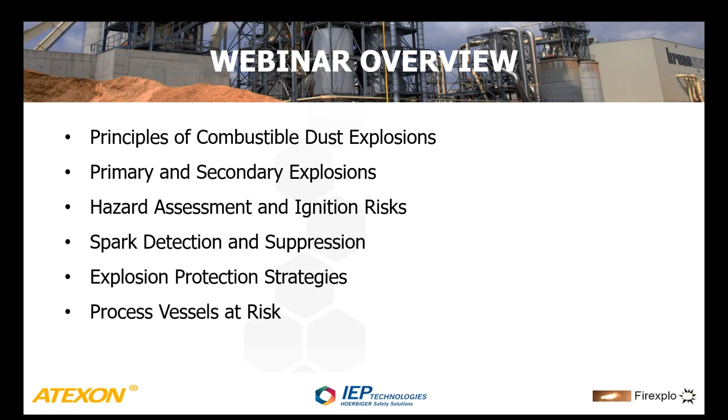Moving along to a quick overview of today's webinar. Our speakers will discuss principles of combustible dust explosions, primary and secondary explosions, hazard assessment and ignition risks, spark detection and suppression, explosion protection strategies, and process vessels at risk. That about covers it, so let's get started and welcome our first speaker, Bob Zalosh of Firexplo.

Bob, you may begin. Thank you, Anna, and greetings, Biomassers. My assignment today is to describe dust explosion hazard analyses for biomass facilities. I'm going to start by discussing the elements of a dust explosion, beginning with, of course, the combustible powder or dust that's often in a layer or pile form.

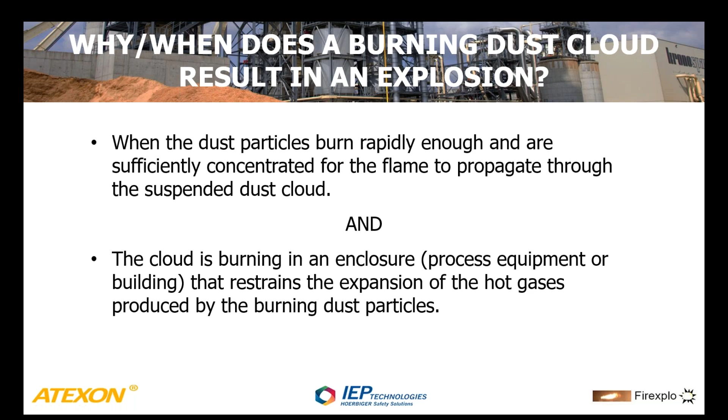In the case of biomass equipment, these suspended dust clouds may be present during routine operation in particle size reduction equipment, such as hammer mills and grinders, in conveying equipment that can be bucket elevators or screw conveyors, in storage bins during loading and unloading, in dust collectors during the in-feed to the collector and during the pulsing of the cartridges or bags.

In the cyclone entrance and towards the more concentrated outflow towards the bottom of the cyclone, in pellet coolers due to the airflow, and in rotary drum and spray dryers. We would normally have suspended powder or dusts.

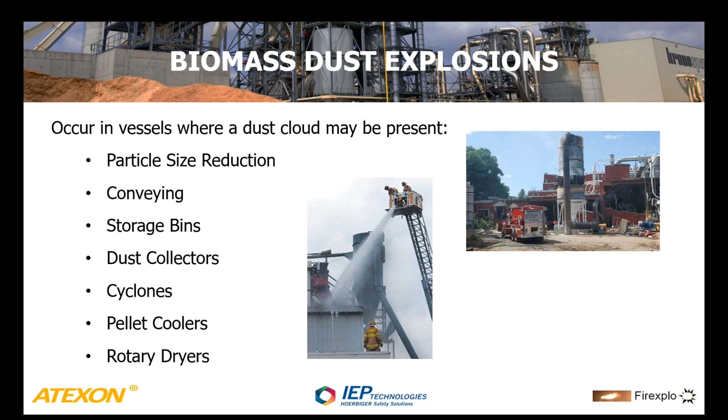Now, I'm going to turn to a few slides on ignition sources in this equipment, and I'm starting with tramp metal as a generic ignition source, and that would be consisting of unwanted metal in the form of screws, bolts, nails, washers, sockets, and a myriad of other small metal objects that can get onto the feed flow, as you well know, if you've operated a facility for any short period of time.

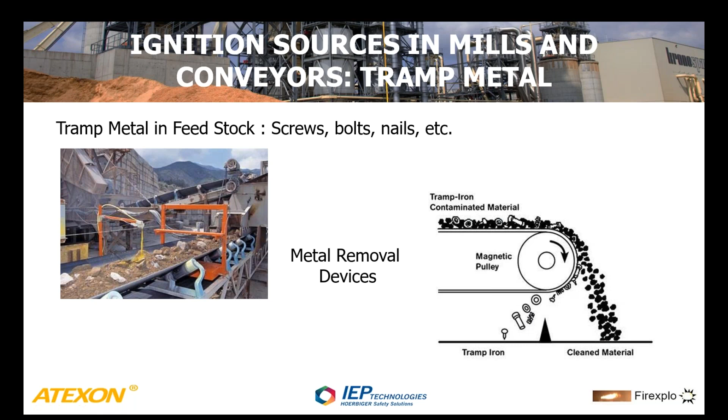And many of the consensus standards require either a magnet or some other metal removal device to prevent those small metal objects from getting into close quarters equipment where they can be lodged between what would otherwise be a moving element, and frictional heating and impact heating can occur, as shown in the next slide.

The next slide goes on to the kind of ignition sources that you might encounter in bucket elevators and various types of conveyors, often due to frictional heating. In this case, possibly from misaligned belts or buckets rubbing on the housing, as you can see from the witness marks indicating the presence of that in some equipment.

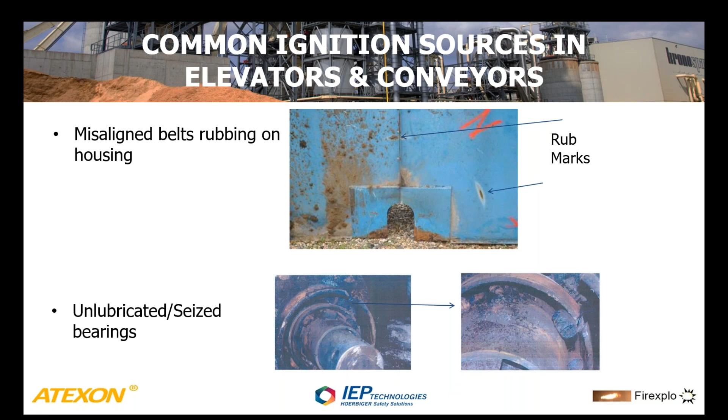Towards the bottom of the slide, you see the other common ignition source in this equipment, which is overheated bearings due to improper lubrication. In particular, the ones on the bottom of the slide occurred on the discharge conveyor of a canola meal silo and started a fire in the silo, which led to other complications you'll see in a moment.

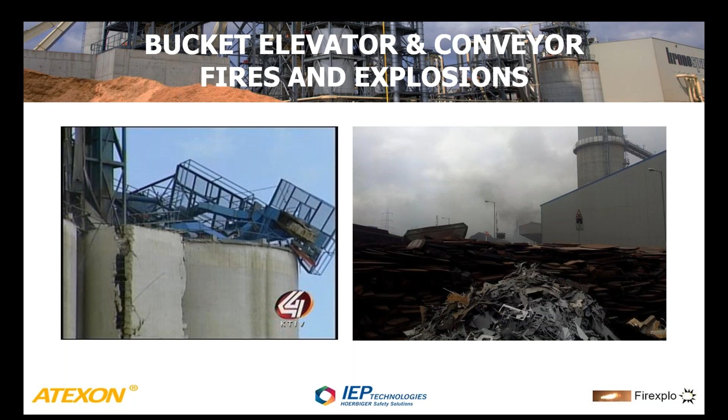Here are some examples of elevator explosions and conveyor explosions that have occurred in some of these facilities, including on the right at a UK port facility where wood pellets were being loaded onto rail cars at the time of a conveyor explosion and silo fire.

Here's a slide on the ignition that can occur in rotary drum dryers, often from particulate accumulations or the recycling of already dry fines. In the example on the left, you see a burned out drum dryer. In that case, the usual material inflow was temporarily halted due to an upstream equipment malfunction, but the fines, which were already drying, were recycled until finally they overheated past the ignition temperature.

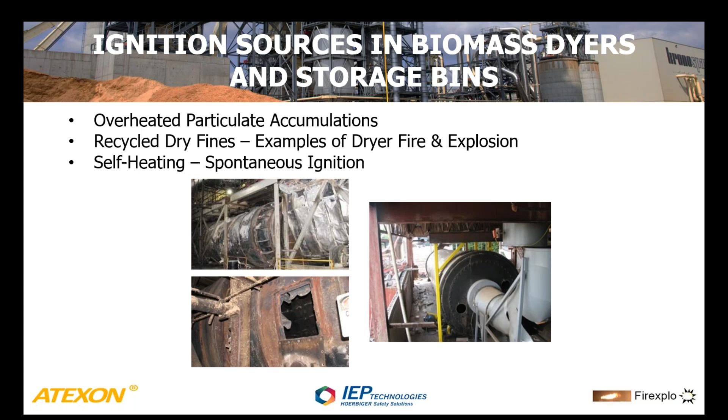The explosion did not occur in the dryer, but in some downstream equipment, which I'll show you in another slide. On the right, you see a large rotary drum dryer in which an explosion occurred, producing damage to the outflow ducting in the lower right, and even more damage at the front and inlet end that caused it to blow out hundreds of meters away and knock off some of the wall cladding on the building you can see in the slide.

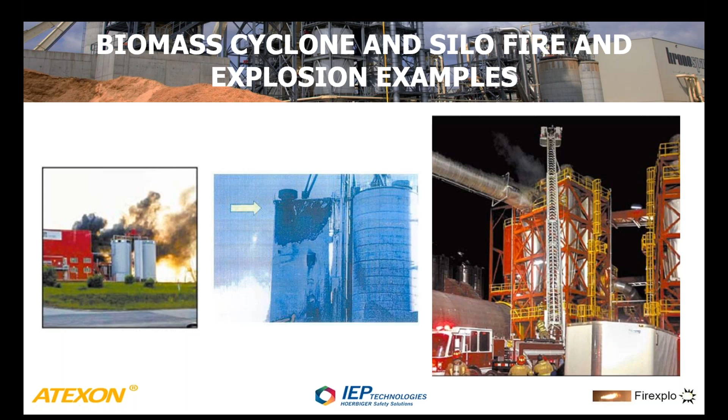Unfortunately, as that's burning, the incomplete combustion products accumulate towards the top of the silo. There's usually a lack of air to create a flammable mixture, but when somebody makes a big hole in the silo to get access to the burning material, that allows oxygen access, and the cutting equipment is the ignition source that created the explosion that caused that damage to the silo.

This shows illustrations of dust clouds and ignition sources that can occur outside of equipment. Starting on the upper left, you see the corn delivery truck unloading station and the receiving pit below, where a dust cloud is formed from the unloading of the corn.

On the lower left is a bag unloading and drum filling station for a mixing operation, where the dust cloud forms. Both of those are examples of open sources of combustible dust clouds.

The diagrams in the center of the slide show the NFPA 499 diagrams to designate where the Class 2, Division 1, and Division 2 areas would be surrounding an open dust cloud. You can see that the Division 1, or in the European case Zone 0, area would extend 20 feet from the source, and the Division 2 area would extend another 10 feet beyond that. On the right, you see examples of dust accumulations in an improperly sealed electrical outlet and heavy dust accumulation on a large motor.

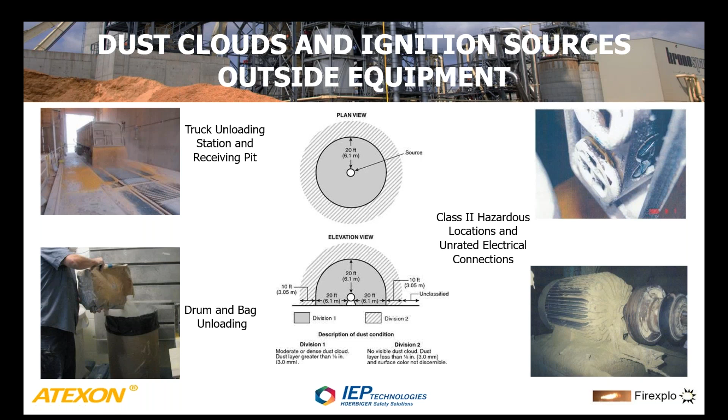This is an example of propagation of an explosion through interconnected equipment, such that the unfortunate casualties occur far from the site of the original explosion, which in this case was in a hammer mill. You can see by the discolored metal that the explosion and fire traveled up the feed chute to the hammer mill, on further up to overhead conveyors, and traveled both upstream and downstream through those overhead conveyors, went all the way back to the receiving warehouse, where unfortunately one of the operators who was feeding material to the end feed conveyor was a casualty of the explosion that propagated and reached him.

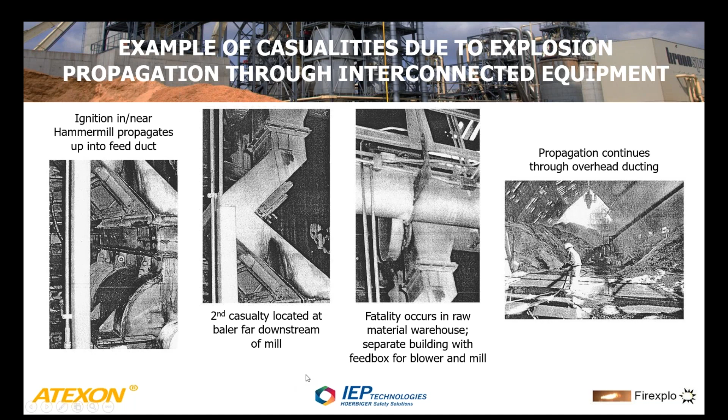There was another casualty located at the baler far downstream of the initiation site.

This is another example of explosion propagation through equipment. This plant was looking at downstream of the rotary drum dryer, where the fines were ignited. Those fines traveled up to a cyclone on the roof, and then the explosion occurred in the cyclone and then propagated through both the inlet and the outlet ducting to other equipment in the plant, and the duct breach in the building produced a secondary dust explosion in the building itself. In this case, there were not excessive accumulations, so there was only minor damage to the building, and luckily only very minor injury.

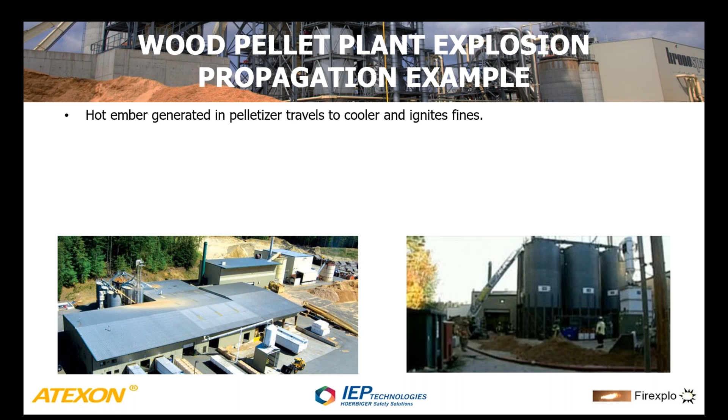This is a photograph of a wood pellet plant that was the subject of some interesting explosion propagation. Hot ember generated in the pelletizer traveled to the cooler in this plant and ignited fines in the cloud suspended dust in the cooler. That ember and dust was transported to a dust collector where the confinement was present that was required for the explosion.

The dust collector was equipped with an undersized explosion vent, so there was some damage. The collector door and ducting were breached, but the explosion did not propagate back to the cooler because of effective explosion isolation in the duct.

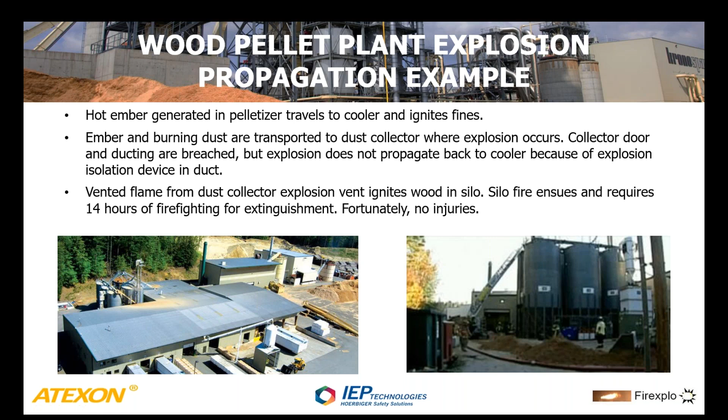Another complication in this particular incident: the silos are located close to the wall of the building in which the vent duct from the dust collector was located, and the discharge of vented flame from the dust collector impinging on the silo wall caused a fire in the silo and required 14 hours of difficult firefighting to achieve extinguishment. Fortunately, in this case, there were no injuries at the plant or to the responding firefighters.

Here's another example of explosion propagation, in another, I believe, pellet plant, where wood dust explosion in the production room propagated to the storage area and throughout the building. Fire spread throughout the building and eventually caused roof collapse. One firefighter was injured from a second explosion in that building.

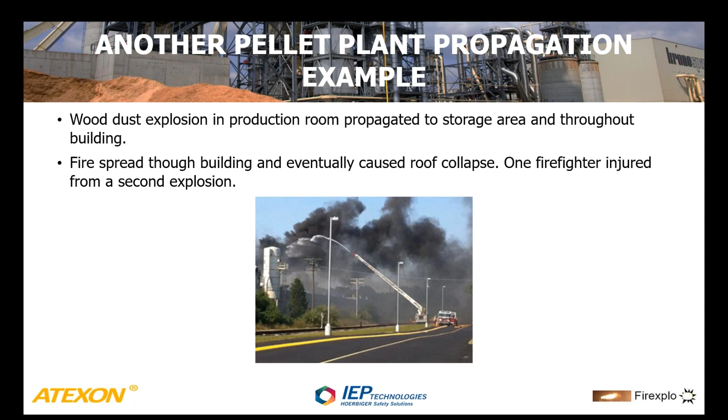The Occupational Safety and Health Administration investigated these two incidents at those two pellet plants, and these are the outcome of those investigations.

In the first incident, OSHA cited the pellet mill for serious violations of specific OSHA regulations and the Section 5A1 General Duty Clause, which requires employers to maintain a workplace free from recognized hazards. In this case, the fire and explosion hazards that became apparent in the aftermath of the incident caused citations. OSHA offered NFPA combustible dust standards as examples of these recognized hazards and possible abatement measures that could have been used.

Unfortunately, in the second incident, OSHA found that the retention bin lacked spark detection, explosion suppression, fire and explosion isolation, and explosion venting devices. Conveyor systems carrying combustible wood products lacked spark detection, fire suppression, or fire isolation devices. You're going to hear a lot more about spark detection from the next speaker, and a lot more about explosion isolation devices from the third speaker.

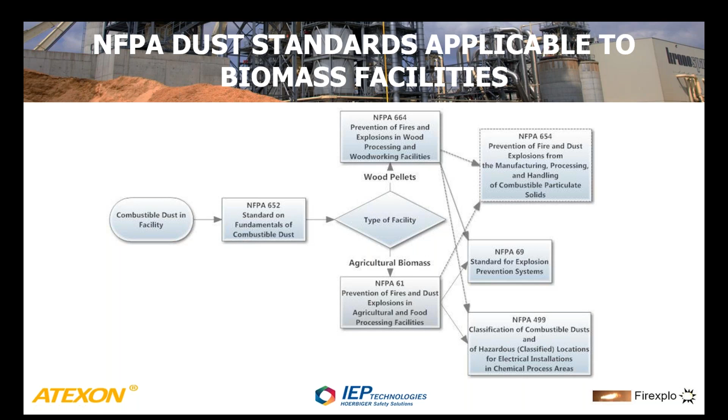Another pertinent standard is NFPA 499, a guide that offers guidance on the classification of combustible dusts and the determination of corresponding hazardous locations — Class 2, Div 1, and Div 2 locations.

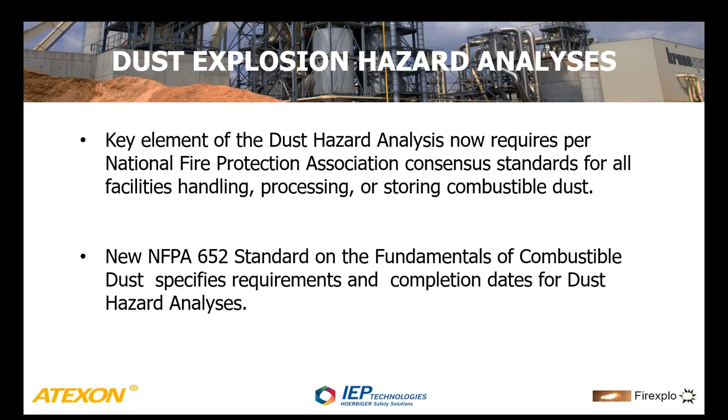Now, the actual dust explosion hazard analysis itself is required per NFPA consensus standards for all facilities processing or storing combustible dust. NFPA 652, the fundamentals of combustible dust, specifies requirements and completion dates.

The actual requirement states that the DHA shall evaluate the fire, deflagration, and explosion hazards and provide recommendations to manage those hazards. It requires a description of specific fire and deflagration scenarios, including the safeguards in place to prevent those scenarios and manage or control the damage from them, along with recommendations of additional safeguards that might be warranted.

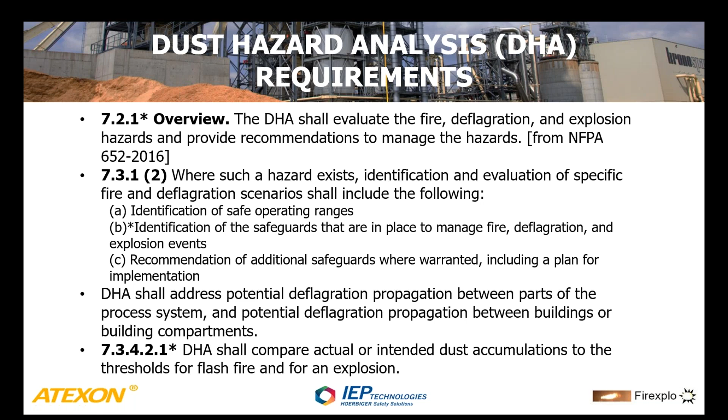This slide is a little out of date — unfortunately we didn't get the updated slide in — but the current requirement in the latest edition of NFPA 652 is that dust hazard analyses, for both new and existing facilities, have to be completed no later than September 2020, with significant progress toward those completions required every year leading up to 2020. This slide was from the previous edition of 652.

Since you've been good, attentive biomassers, I've thrown in a bonus slide showing an interesting example of what can go wrong unexpectedly, not necessarily involving combustible dust, but resulting in an explosion. What we're looking at is the remains of a Quonset hut building at a biodiesel plant.

One of the byproducts of biodiesel production is glycerol. Glycerol has a melting point high enough that on a cold day you have to heat the tank to get it to flow. On this particular cold day, the tank was overheated, and flammable vapors of glycerol came out of the tank into the Quonset hut building.

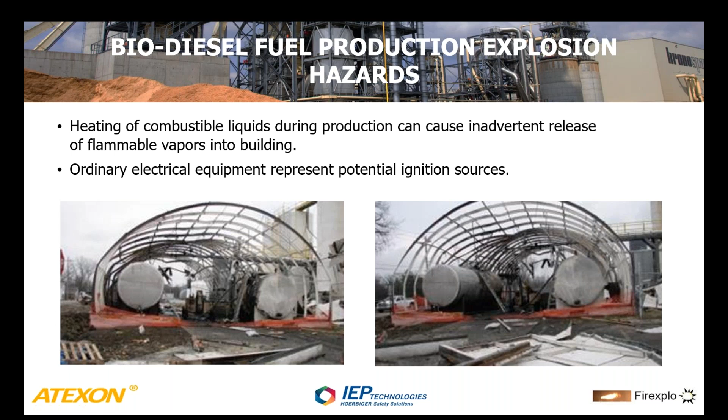At that point, I'll thank you for your attention and throw it back to you.

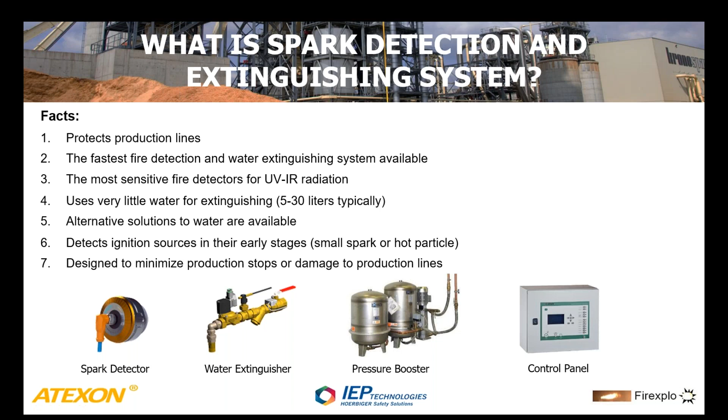Pressure booster station is also a very important part of the system. It boosts water pressure high enough and makes sure that there are no air bubbles in the extinguishing water. And then the control panel, of course, monitoring everything. It acts as a user interface, and it stores all the events to memory.

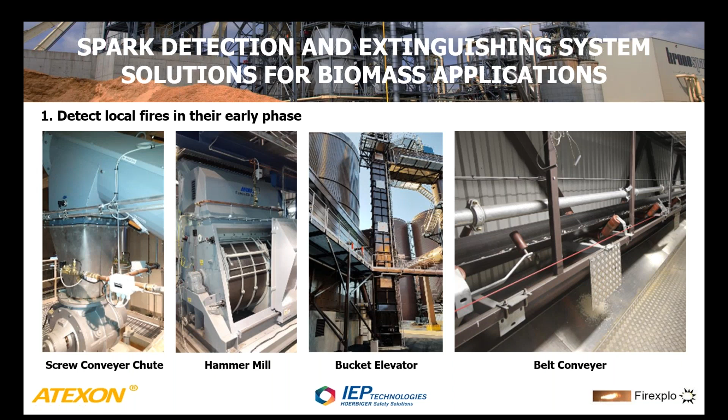There are basically 2 different reasons to install spark detection and extinguishing systems. The first one is to detect local fires in their early phase. They can be inside of the conveyor chute, inside of the hammer mill, bucket elevator, or belt conveyor. At the very early state, the spark detection system can react to those fires and minimize the risks or damages to the production lines, making sure that they don't travel forward in the production line inside of the conveyor line, for example, because extinguishing is very difficult to proceed there.

The other reason why we have spark detection systems is that we use them to minimize risk for dust explosions. Explosions typically happen in vessels like silos or dust collector pellet silos, and for that reason spark detection and extinguishing systems are installed to conveyor lines leading to those vessels. So the spark detection and extinguishing systems suppress all the ignition sources before they have access to those explosible vessels.

Bob handled this topic already very well. Just a short overview. Typical ignition sources: mechanical sparks because of physical impact. Any mechanical movement greater than 1 meter per second can create a mechanical visible spark, and it's typically yellow colored. A hot particle is even more dangerous because its energy level is much higher, and typically it happens due to friction.

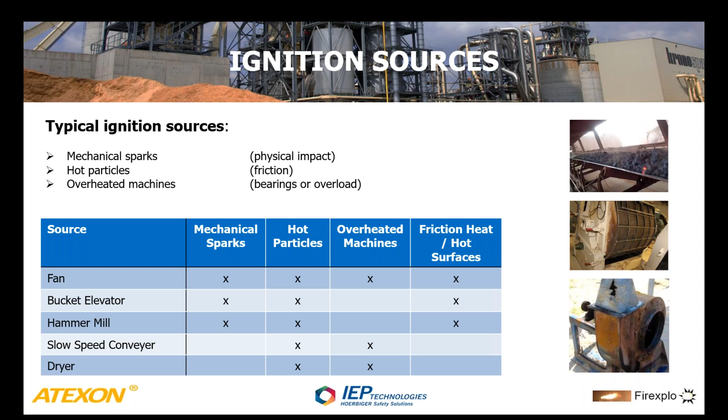If something is wrapping around the wings of the fan, it can produce friction heat and also produce hot particles. And sometimes those dedusting pipes or pneumatic transporting pipes can be blocked, and then air doesn't move forward, and then the perimeter of the fan's temperature can increase higher than 200 Celsius degrees and ignite a local fire. State-of-the-art spark detection and extinguishing systems have integrated overheat sensors that can also measure overheating from the machines.

Bob also handled this topic already. I think everybody knows the explosion pentagon, what is needed for dust explosion. Here I have a short video showing how easily it can be done in real life. So we have a miniature dust collector. We have a small blower at the bottom. We have 50 grams of wooden dust, and finally a cigarette lighter as an ignition source.

And once we put an ignition source inside of the vessel and we start this blower, immediately it will explode.

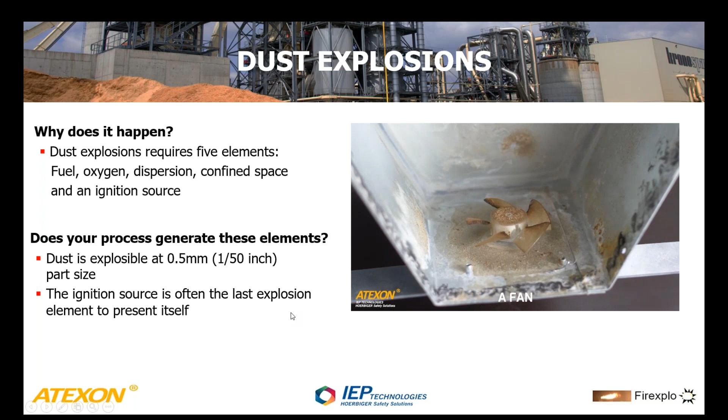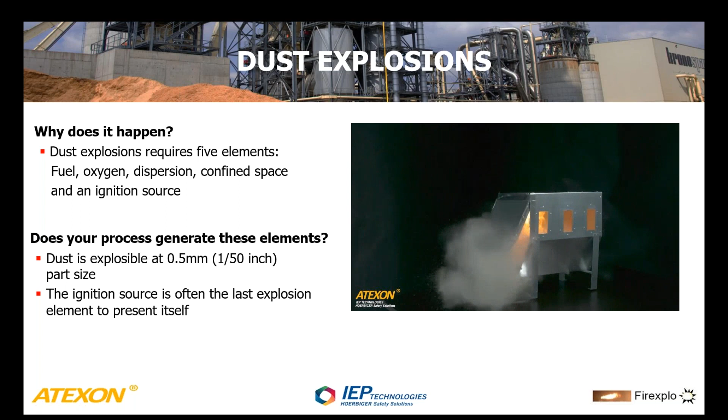So a very strong explosion happened even with only 50 grams of wooden dust. And we used aluminum tape to seal, to put those metal parts together. If they would be welded or if pop rivets or something were there, the explosion would be significantly stronger.

So the question is, do we have those elements? In biomass applications, typically the ignition source is often the last explosion element to present itself. So all the rest we typically have there. A very good starting point is to look for dust particle size smaller than 0.5 millimeters. It's kind of a rule of thumb. If you find that small dust particle size, it's a sign that it can explode.

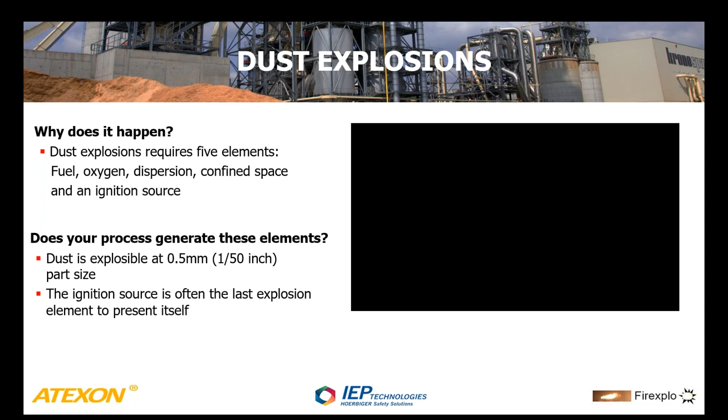So here we have another video showing a solution, how spark detection and extinguishing systems, how quickly and how sensitively they can detect sparks and produce water spray inside of the conveying line.

So we have here a 300 Celsius degree hot particle. It's not a spark, it's a hot particle, it's dark, it's not visible, you cannot see it by eye. But the spark detector is very sensitive and can react, also detect that kind of ignition source.

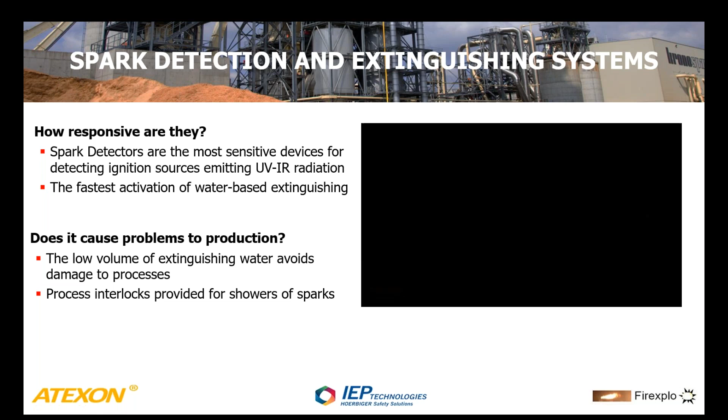Airflow speed can be up to 60 meters, 200 kilometers per hour, and still a spark detector has time enough to detect it, and the extinguishing system will suppress the ignition source, using only a few liters of water to avoid damages to processes or production lines. In case of multiple detections of sparks, the control panel will interlock the production line.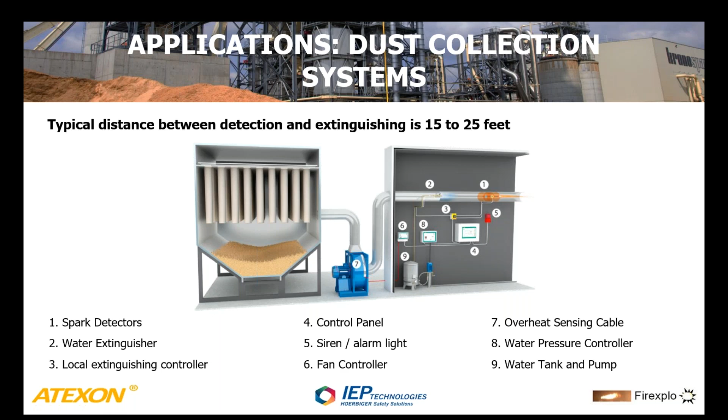Here we have another application, conveyor chute. What is the difference? It's the speed of the material. With dedusting applications, it's 20 to 30 meters per second material flow speed, but here typically we have only 2 meters per second.

Spark detectors are monitoring ignition sources dropping down by gravity to the lower conveyor. Then the local control unit activates water spray. Water is sprayed from nozzles in the chute, and extinguishing will stop automatically. If we detect more sparks, the extinguishing will of course continue, but everything works automatically. In case of multiple detections, the conveyor line will also be stopped.

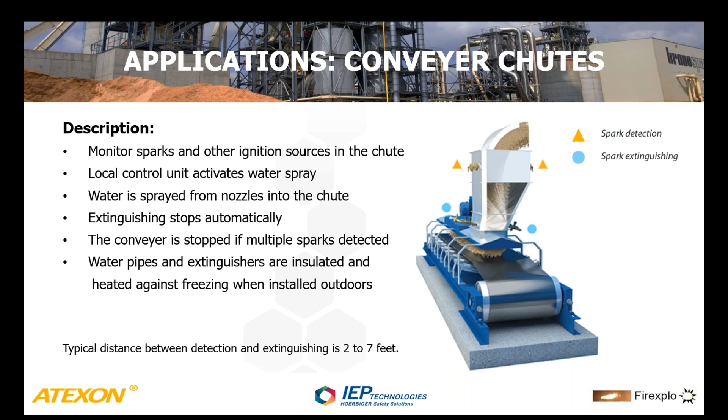Sometimes those extinguishing systems have to be installed outdoors, and then they must be covered with thermal insulation and equipped with a heat tracing system. Typical distance between detection and extinguishing is only 2 to 7 feet here, because of the lower material flow speed.

Bucket elevator protection is quite similar to any other conveyor chute protection. At least the outlet or discharge chute of the bucket elevator should be equipped with spark detection and extinguishing systems.

The bucket elevator is rotating or moving with relatively high speed, and it can easily produce many different kinds of ignition sources: friction, heat, hot particles, or mechanical sparks. The distance here from detection to extinguishing is typically 1 to 2 meters, or up to 7 feet.

Spark detection and extinguishing systems can also be used for monitoring dryers. Those wood chip dryers - wood chips travel on the dryer belt, and there is heated drying gas flowing through the material layer, and moist drying gas is vented to the atmosphere.

Spark detectors are typically installed in those ducts leading to the sky. So if there is a fire inside of the dryer, airflow will carry those ignition sources to the sky through the fan. And just before the fan, we have those detectors monitoring the duct, and we can give an alarm to the local PLC or factory automation system.

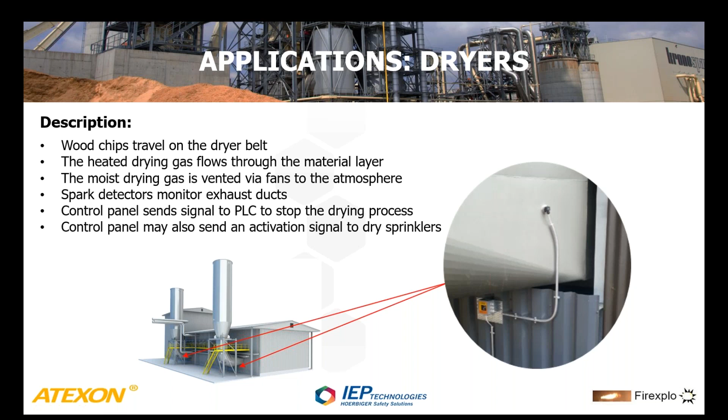I think pellet manufacturing process is a very typical biomass application, and there are a lot of dangerous processes like drying, grinding, and pelletizing. The hammer mill is a very dangerous component, machine or equipment, rotating at very high speed and frequently producing mechanical sparks. It's a good idea to have some distance before detection because the hammer mill also produces low energy sparks.

It's not a good idea to spray water all the time. It's better to install detectors a little bit forward, some distance after the hammer mill, and wait to see if those low energy sparks have already died out. And if not, then the water extinguishing has to be started.

We have bucket elevators, and many times at least the discharge chute of the elevators should be protected or equipped with spark detection systems. Pellet mills use high temperatures, typically 90 to 100 Celsius degrees, and if there is some failure inside the mill, the temperature can immediately rise and ignite a local fire or even dust explosion.

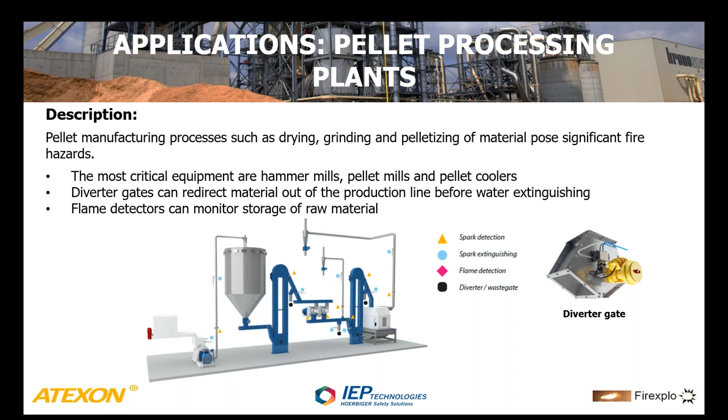When choosing a spark detection and extinguishing system for biomass applications, there are two very critical parameters for the detector, and the first one is viewing angle. Picture number 1 in the top left corner shows the conventional low-cost spark detector having a 110-degree viewing angle. They work very well in dedusting pipes where the concentration level is not that high.

Picture number 2 describes what happens if we have very thick material flow between the detectors. The opposite detector can no longer cover the blind spots of the other detector. For that reason, it's important to have a 180-degree viewing angle with biomass applications, because then the opposite detector doesn't need to cover blind spots of the other detector, since there are no blind spots.

Picture number 3 shows this vertical line in the middle of the circle, which is the point where the detector has to detect. So the left detector will cover the left half of the pipe, and the other detector will cover the other half. This means the detection distance is now halved compared to picture number 1, and when distance is halved, we get 4 times better sensitivity due to radiation theory.

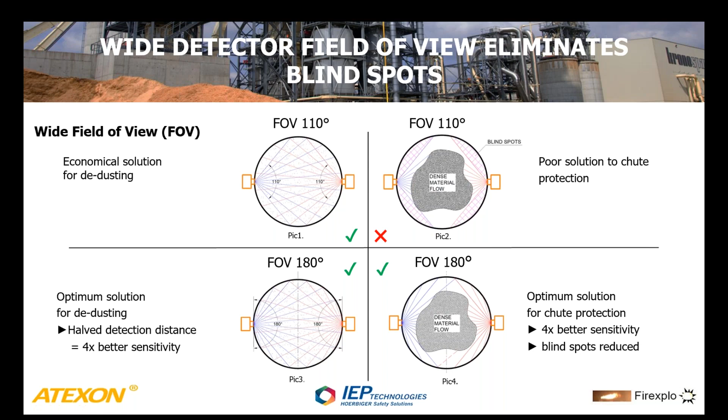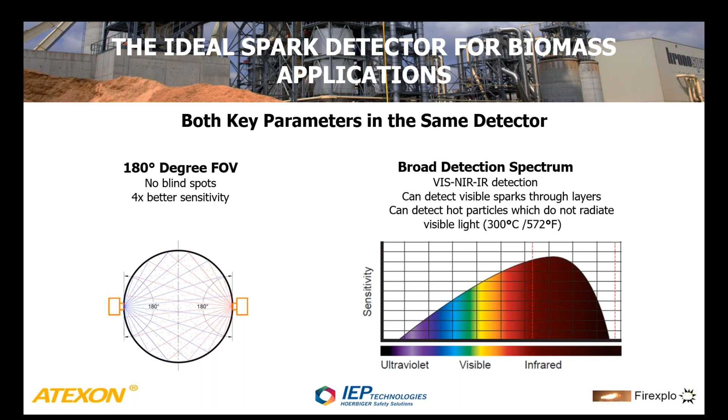So the optimum solution is to combine those two, having a wide or broad detection spectrum starting from visible light and going into the infrared area. Then the detector can detect visible sparks, sparks through layers, and also hot particles emitting no daylight—totally dark particles, but still capable of igniting dust explosions. So an ideal spark detector for biomass applications has both key parameters in the same device: wide 180-degree viewing angle and broad detection spectrum, so all possible ignition sources detectable with an optical sensor are covered.

State-of-art spark detection and extinguishing systems also support other solutions, and they are integrated into the same system, behind the same battery backup and the same user interface.

The first one is the surface overheat detection cable. As I mentioned earlier, it's a good solution measuring temperature from a very long distance. It measures temperature from the electrical motor, just above the ball bearing, and from the perimeter of the fan. So if there's a channel blockage, the temperature on the fan perimeter will increase and we can detect it. If there's a ball bearing failure, the area just above the bearing will heat up quickly. And if there's overload on the electrical motor, the motor temperature will increase.

On the right is a single point heat detector, which can measure perhaps ball bearing failures or motor overloading, but it's still not a complete solution.

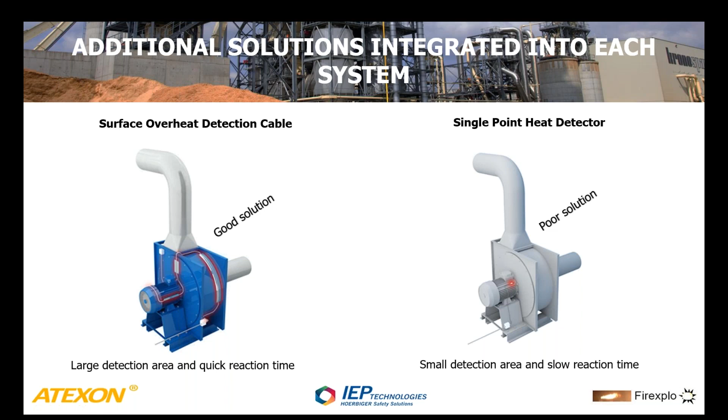Sometimes it's not possible to measure always inside the process lines, but you need to come out of the process line and monitor a limited local area, still part of the production line but outside. For that purpose, flame detectors are available, and they can be installed into the same spark detection and extinguishing systems.

Reaction time of these detectors is significantly longer than spark detectors, typically 1 second, 3 seconds, sometimes even 10 seconds. Still relatively high speed fire detectors, but a totally different level to spark detectors. And when the detector has more time to analyze fire, it's more immune to false alarms. There are mathematic algorithms, and the sensor even knows what is burning, whether it's plastic, wood, or paper.

But spark detectors have to react within 1 millisecond, so they cannot make that kind of analysis. For that reason, spark detectors are typically used in enclosed, dark environments, while flame detectors are used in open areas, monitoring machines or a small part of the production line.

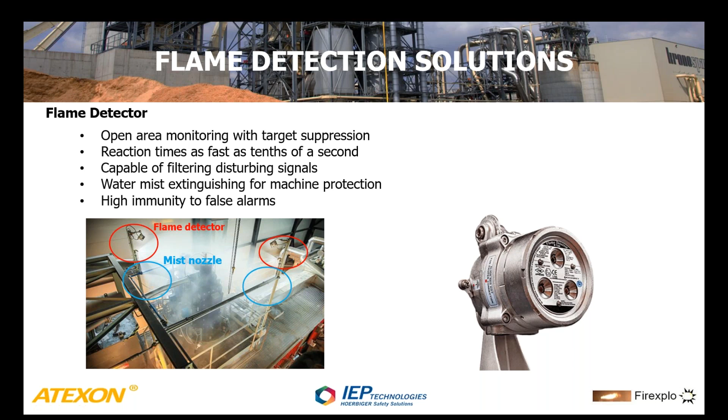Water mist extinguishing can be controlled by the flame detector. For example, in this photo at the bottom, a very fine water mist extinguishing system is used to protect a hybrid burner.

Gas detectors are also available when a biomass application is protected by spark detection systems. There are always raw material storages that need to be monitored, and there are different kinds of gas detectors monitoring many different gases, to make sure it's not only carbon monoxide, but that something is really burning there. It's important to have more than one gas monitored, not only CO. These are used for protecting silos or fuel storages, some kind of enclosed, bigger areas.

Typically these are not connected to any water or extinguishing system, but they only provide warnings or alarms for users.

There are also some ancillary devices that can be controlled by the spark detection and extinguishing systems. Diverter gates are used if water is prohibited, because it's not possible to use water due to damage to material or the production line. Slide gates are typically used together with CO2 extinguishers, so before releasing CO2 gas, it's sometimes needed to stop airflow so the gas doesn't escape the system.

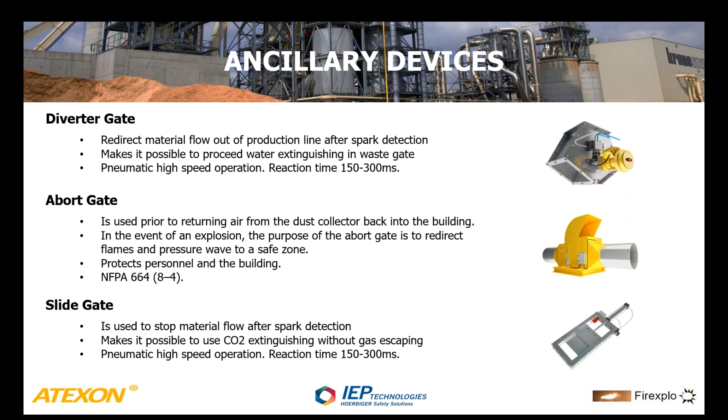Short summary from my presentation: spark detection and extinguishing systems can provide very early phase fire detection and extinguishing. They are designed for protecting production lines, always using low volumes of extinguishing water, designed to minimize production stops, and detector solutions offer additional technologies such as gas and flame detection.

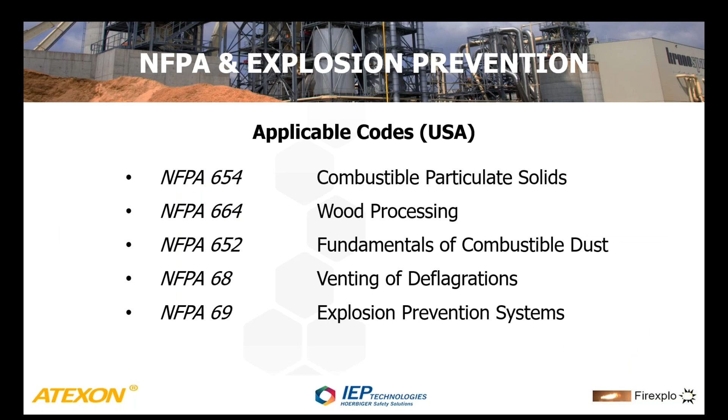Explosion venting is the first technique that we're going to cover. And explosion venting is by far and away the most common means to protect a vessel from an explosion. Explosion vents are an opening in a process through which combustion-generated gases can flow to the outside and then expand. The whole purpose for an explosion vent is to minimize the overpressure to a point where you don't have rupture or even deformation of the process vessel.

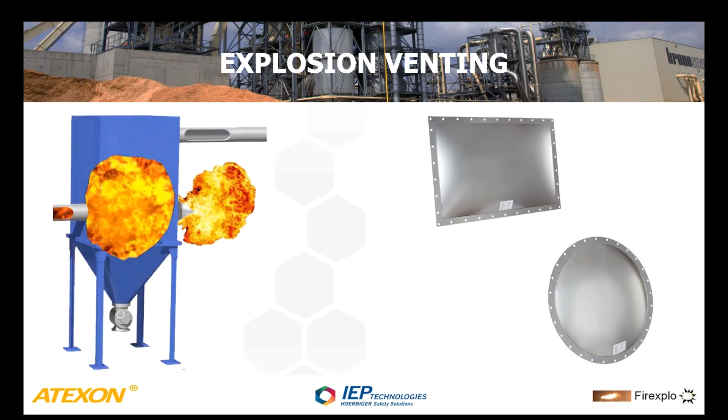Explosion vents come in a lot of different shapes and sizes. Some are round, some are rectangular, some are square, or some that are domed, some are flat. Some open through a rupture style, such as the type that we're showing on this particular slide, where there's score marks and they open at a predetermined pressure level. Others are held on by magnetic latches. Some have shear bolts or plastic bolts that let loose. There are some that are even gravity type vents. In all cases, these vents are designed so that they would open up at a predetermined set point.

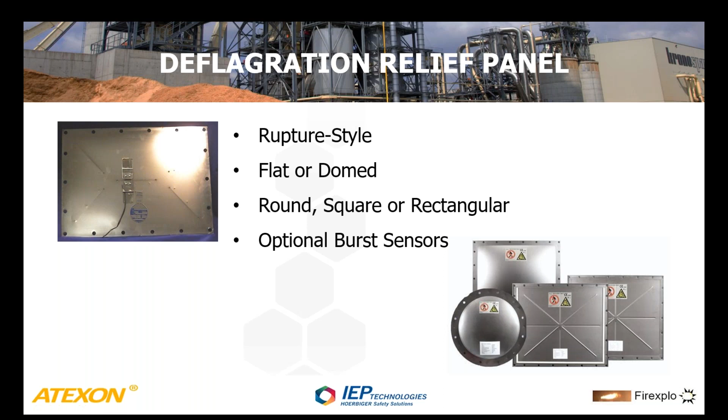The size of that fireball can be more than 7 times the volume of the vessel, and the ejection distances can exceed 50 feet. I remember doing a calculation some time back where, in one particular application, the calculated fireball distance was 132 feet. So it's really important that when you look at explosion venting, even for an outside vessel, you make sure that fireball is not directed at a parking lot, at a sidewalk, or at another process vessel.

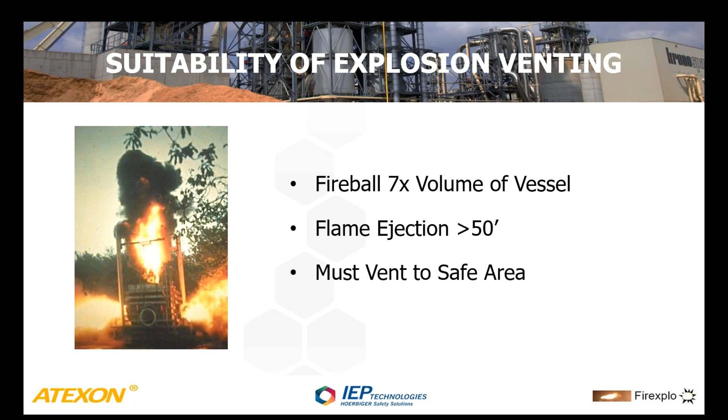This graph shows what actually happens during a vented explosion. The point where the vent opens up is called the static pressure, or P-stat. It takes a finite amount of time for that vent to fully open, and during that period the pressure continues to rise until you get the full effects of the vent opening. At the point where pressure starts to degrade, it's called P-red, or reduced pressure after venting. The P-red is the value you should look at when determining how much vent area is needed for a particular application.

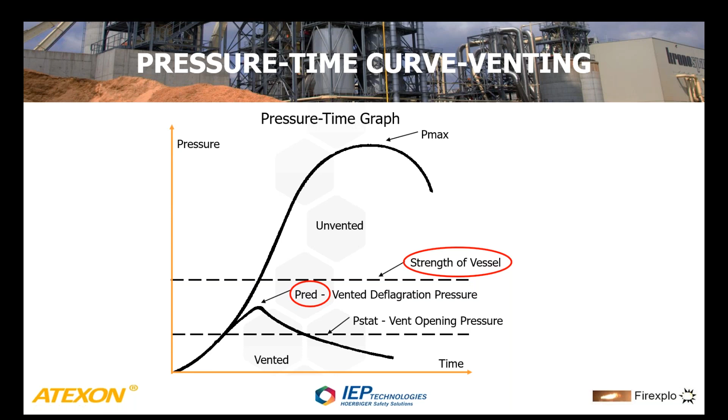That P-red must always be below the strength of the vessel. As a matter of fact, NFPA 68 recommends that it should not exceed two-thirds of the burst pressure of the vessel. The point of this slide is that if you have a vent designed to open at 1.5 psi, and a vessel designed to handle 1.5 psi, it's not going to work. The vessel will likely tear apart if you get a good homogeneous dust-air mix within that vessel. It's the P-red that we're really looking at, keeping that below the vessel strength.

NFPA 68 is the standard used for determining the sizing for the explosion vent.

There are some calculations in NFPA that advise you what the penalty is, either in vent oversizing or beefing up your vessel, to account for the vent duct that must be installed.

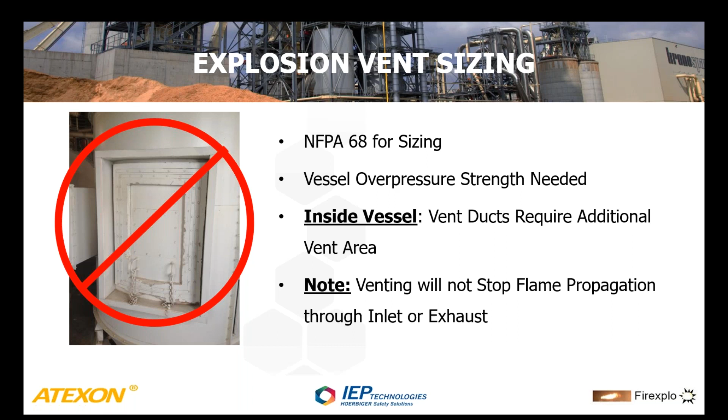Finally, on explosion venting, keep in mind that all a vent does is relieve pressure. It will not put out the fire or subsequent combustion going on inside the vessel, so that must be accounted for. It will not stop any flame propagation going upstream, downstream, or through the exhaust duct if that exhaust is being recirculated.

There is a second means of explosion venting sometimes used for inside vessels, called a flameless explosion vent. A flameless explosion vent is an opening with a flame arrestor around it, through which the combustion-generated dust and overpressure would travel, and that flame arrestor drops the temperature down to about 90 degrees C.

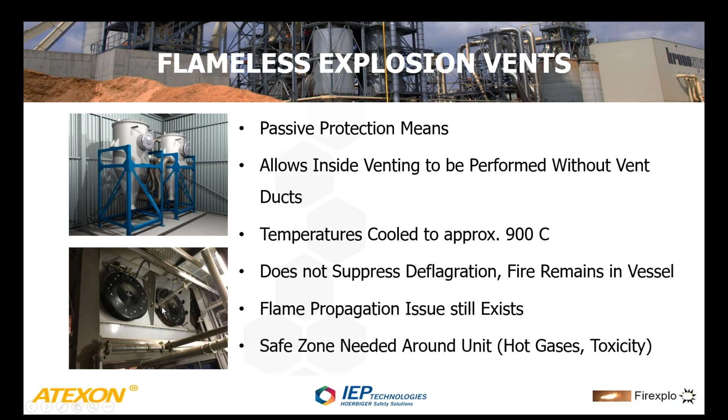There's a little typo here where it says 900 — in reality it's 90 degrees C, something under 200 degrees F, as these hot gases are emitted to the outside perimeter of these flameless vents. You'll see on these vessels a couple of mounted flameless vents, as shown on the upper vessels.

Now, the way one particular type of flameless vent works — the spring-loaded style vent, the type we saw in the previous photograph — right here would be the actual vent itself, with a spring positioned just above it. During normal operations, the spring holds the vent closed. When you have an explosion, the pressure pushes the plate up, compresses the spring, and then the hot gases and flame travel through this sintered metal, which acts as a heat sink, absorbing the heat, so that all that's released is hot air and some dust to the outside, but no flame.

Flameless explosion vents do have their place. They're typically good for smaller volume applications, for stronger vessels with a slightly higher P-red. Even though they're not emitting flame, they still should have a safe zone around them, because in that 180 to 200 degrees F area, someone could be scalded if they get hit by that temperature. So you still want an exclusion zone around the perimeter of flameless explosion vents. They certainly do have their place and can be a very effective explosion protection means.

The next explosion protection means we'll cover would be explosion suppression systems. These are systems that detect an explosion at early stages and then very quickly disperse a suppressant agent to put out that explosion while the fireball is still relatively small.

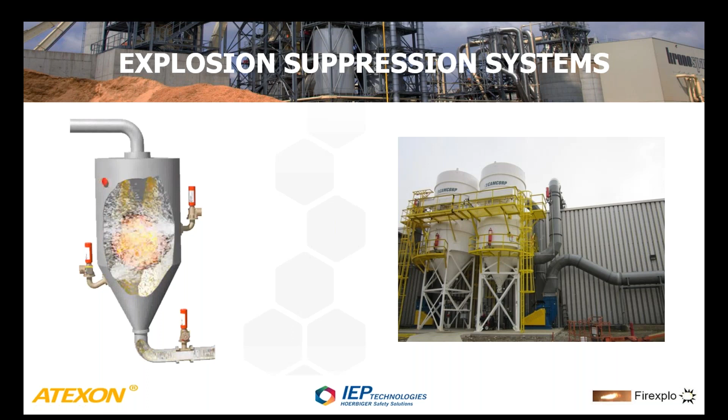If you recall, we talked about the 5 elements needed for an explosion: oxygen, a confined vessel, an ignition source, the dust as combustible fuel, and that dust being in dispersion. So what we're going to show now is just an animation of an explosion suppression within a confined vessel.

The red device that we see here would be a pressure style detector. We show an extinguisher on the side of this vessel, as well as an extinguisher on the inlet duct, and I'll cover that in just a second.

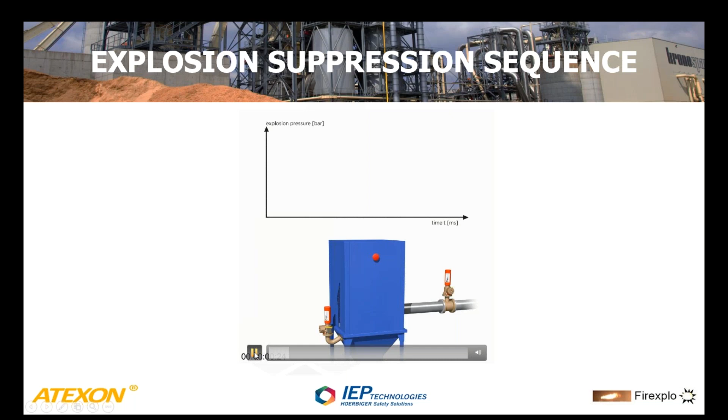Above, you'll see a kind of time lapse of this event. You can see the pressure that's emanating from the explosion. That pressure travels at the speed of sound, or about 1,100 feet per second, while the fireball itself is only growing at something in the range of 3 to 10 meters per second, or 10 to 35 feet per second.

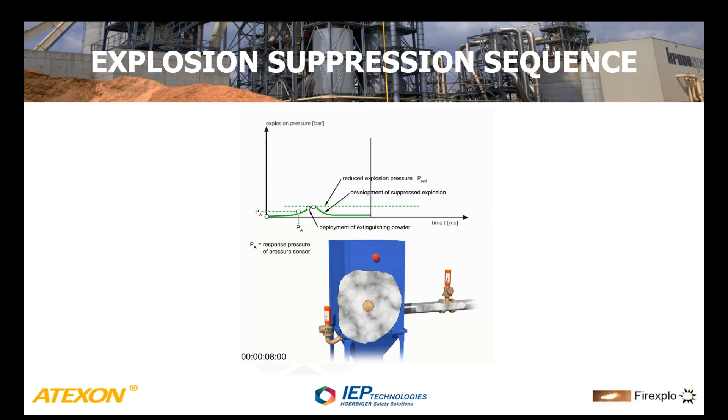So that pressure wave traveling from the initial deflagration is picked up by the pressure sensor through a control panel, and that triggers the suppression system to activate.

Explosion suppression systems are similar to a fire suppression system in that they have three main components: detection, control, and extinguishers.

The systems do operate much quicker, however. Detection is typically done using pressure-activated detectors. At times we might use infrared detectors or even ultraviolet detectors, but the most common for combustible dust, which we would find at a biomass type facility, would be a pressure-style detector.

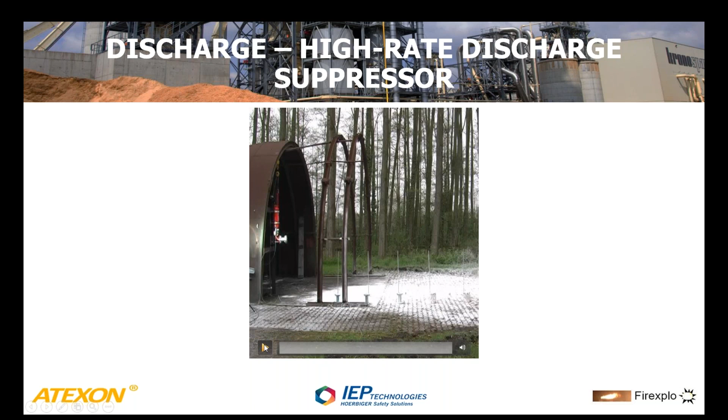We're going to show a video now of the extinguisher, just so you can get a sense of how fast these extinguishers must discharge in order to put out that deflagration.

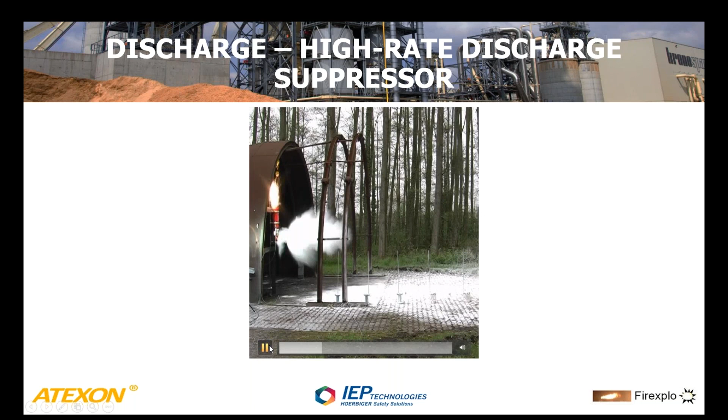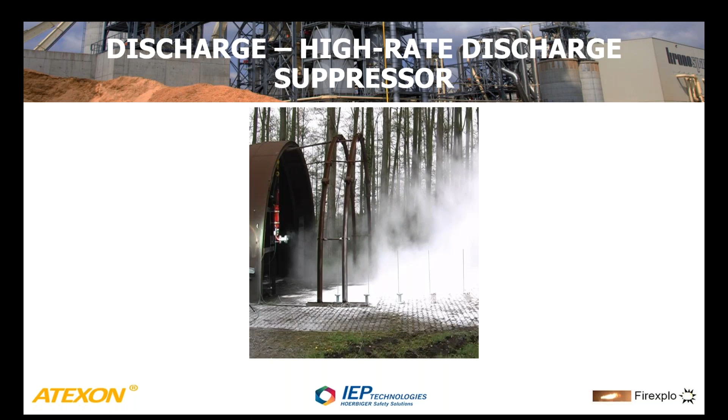That agent velocity is about 250 feet per second. And it has to be that fast for that agent front to get to the flame front within the milliseconds required in order to get effective suppression before the overpressure gets to the point where it ruptures the vessel.

In order to design an explosion suppression system, there's some basic information that must be obtained: knowing the type of material and its explosivity characteristics, which I'll touch on in just a slide or two; the process conditions, operating pressure, operating temperature; the vessel volume, even the L over D of the vessel, will affect the geometry of how the explosion itself is going to grow within the vessel.

Certainly the vessel strength is very important, because when you design an explosion suppression system, you try to stay below that vessel strength so you don't have a ruptured vessel even during a suppressed event.

Typically, systems nowadays are designed using computer modeling. Some of the more archaic methods of designing an explosion suppression system that were used years ago would use a simple volume versus concentration calculation.

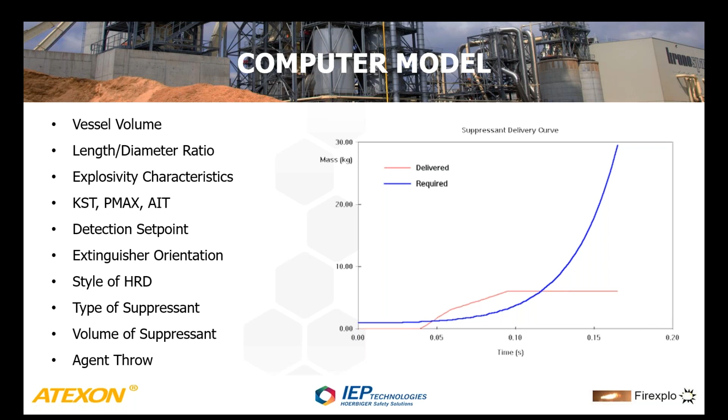We know from many tests now that there are a lot more parameters that must be taken into account when you design an explosion suppression system, including how far you have to throw the agent, what the detection set point is going to be, even whether the extinguisher is going to be mounted vertically or horizontally. So all this information is put into a computer model to determine an explosion suppression system that's correct for a specific application.

Whether you're using venting, flameless venting, or explosion suppression, you still have an issue in that vessels are being fed and they're typically discharging, and oftentimes there's duct lines. Through these openings, flame propagation can occur.

Does it make a lot of sense to have a dust collector that's outside, that has explosion vents properly employed, and have that vent work properly? The vessel itself is saved, but an explosion will then propagate back through the inlet duct back into the plant, picking up off of various vessels, causing secondary explosions. Basically, the dust collector is saved, but you lose the inside of the plant.

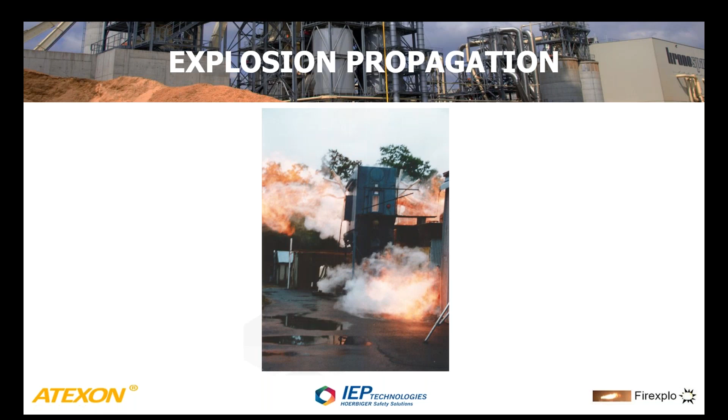Makes no sense. It's really critical, and maybe one of the most overlooked parts of an explosion protection philosophy within a facility, to have proper explosion isolation on these propagation points.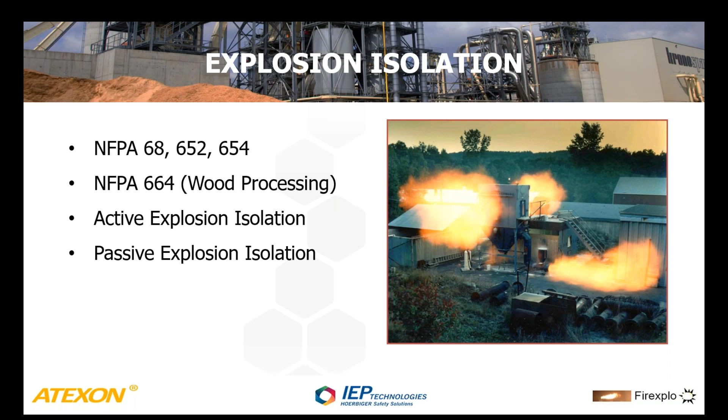Most of the NFPA documents regarding combustible dust and wood processing in biomass facilities, really any combustible dust application, do mandate the use of explosion isolation. There are a couple of different types of explosion isolation that can be used. The first one is known as active explosion isolation. The second is passive explosion isolation.

An active explosion isolation method would be the use of the same style of extinguishers that might be used for suppression, but instead of being positioned on the vessels or used in conjunction with suppression on vessels, they would be located on interconnecting ducts, pipes, chutes and so forth to create a chemical barrier to stop the flame from moving from one vessel to another.

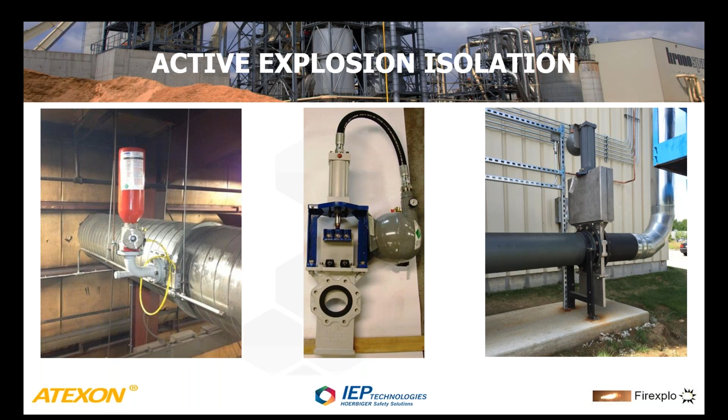So chemical isolation would be the most common means of active explosion isolation at biomass facilities.

Passive explosion isolation is becoming increasingly more recognized and used, especially in dust applications, where you're picking up dust from vessels and traveling to some sort of a dust collection system, whether it be a cyclone or a dust collector. These passive isolation valves basically work on the principle that the airflow going through the valve would open up an internal flap inside the passive isolation valve, and then that dust would pass through the valve onto the vessel.

When an explosion occurs, recalling that we have a pressure traveling faster than the flame, the pressure front would cause the internal flap to close so that when the fireball reached that flap, it would be mechanically stopped. Because these valves are often less expensive than a chemical barrier, they're increasingly more commonly used.

We're going to run a quick video just giving you an animation of how the valve actually works, both in normal speed and then in slow motion.

So here we see the dust-laden air travel through the flap valve that opens up the flap. When the explosion occurs, the pressure front is going to close that flap so that by the time the fireball gets there, it's going up against a closed gate.

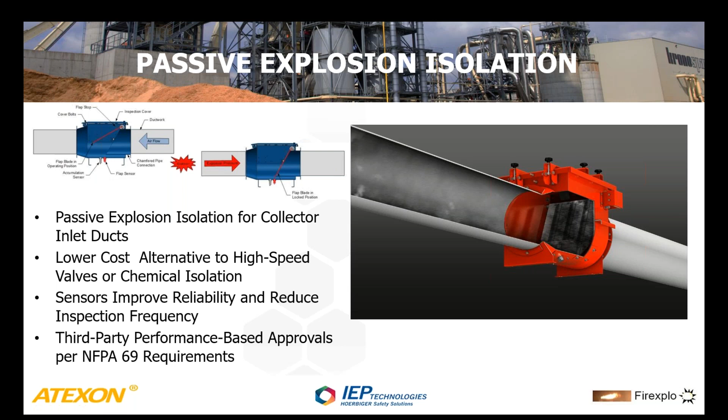There is a section in NFPA 69 that specifically handles the minimum prescriptive requirements for the design and use of flap-style passive isolation valves.

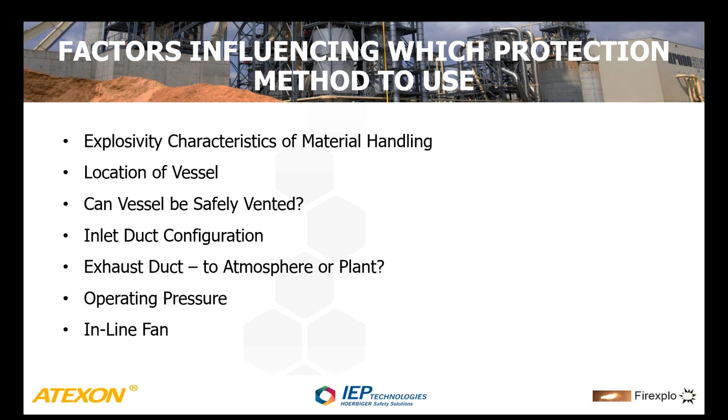Because we have a number of different choices when we're looking at explosion protection, some of the things that must be taken into consideration for what type of explosion protection should be used are listed here. Basically, if the vessel can be safely vented, then venting is often going to be your least expensive alternative. But keep in mind that you must take into account the explosion isolation threat, propagation threat, and isolation protection measure.

Mentioned before that the explosivity characteristics of the dust is going to have a big factor regardless of what type of explosion protection is being used. Some of the most common characteristics that would be looked at by companies that design explosion venting, explosion suppression, explosion isolation systems would be the maximum pressure developed during an explosion, known as the Pmax, and an explosivity indexing based on the rate of pressure development, which is the KST.

The KST basically tells those of us designing explosion prevention measures how fast we have to react to an explosion. For those of you that have plants with combustible dust, whether that explosion pressure is going to grow in 50 milliseconds or 500 milliseconds doesn't matter. You're not going to be able to react fast enough if you don't have the proper protection measure in place. So it's really important that you keep that in mind.

The KST just tells us how much time we have to react. It really doesn't tell us how much pressure you're going to generate during an explosion, or whether or not you have an explosion threat, unless your KST value is really low, in the range of single digits.

We're going to quickly cover some of the most common risk areas within a process area for a biomass facility. One of the most common explosion risks we find in any organic dust application is a dust collector, bag house, filter receiver, or air material separator.

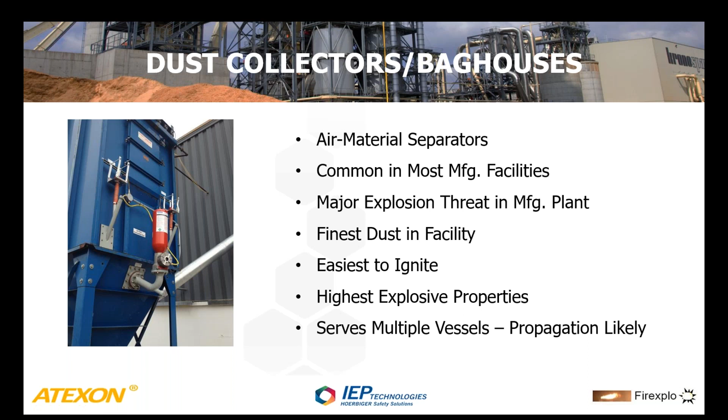One other big threat with dust collectors is that oftentimes these dust collectors may serve multiple vessels, with dust pickup from multiple vessels. So if you have an explosion within a dust collection device, the propagation threat spreads to different areas of the plant, making the threat even more serious to address.

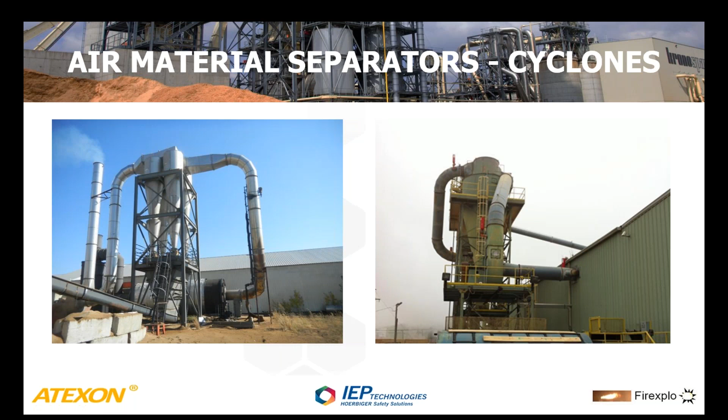Other types of air material separators common for biomass facilities would be cyclones. Cyclones present some of the same types of risks that we would see in a dust collector.

Mills, grinders, and pulverizers are some of the most common mechanical ignition threats that we'll find within the facility.

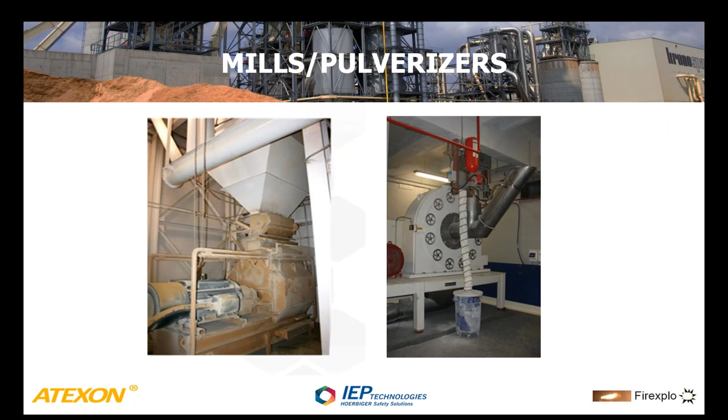Material and product conveying: in and of itself, the ignition source usually isn't going to start within mechanical conveying unless you have a bearing that's gone bad. But let's say you have a belt conveyor - sometimes that ignition source may be conveyed into that conveyor, and at the pickup points, load points, and discharge points, you have dust clouds in which an explosion can occur.

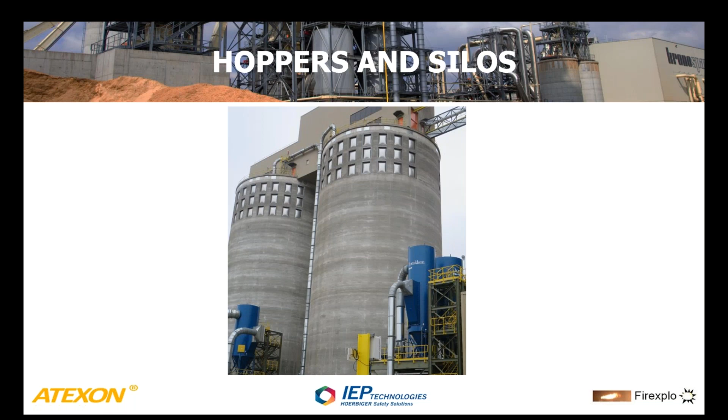Just to summarize what we've covered: when looking at explosion prevention at a biomass facility, the first thing you want to do is a good process hazard evaluation. We want to look at the normal, abnormal, and upset conditions that can occur within each part of the process, and how combustible the material is.

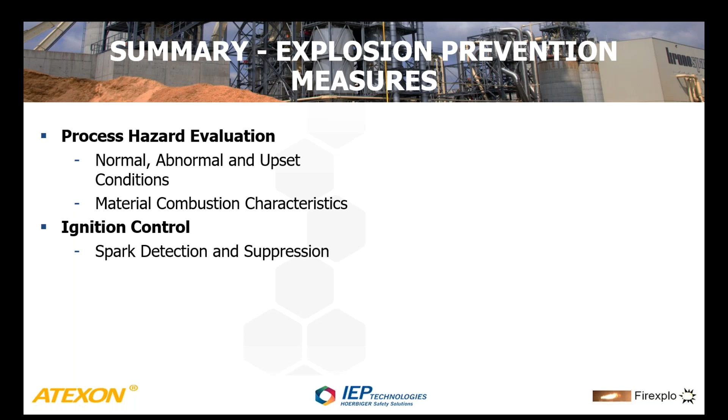How easily is it to ignite? Is it susceptible to electrostatic discharge from an ignition source standpoint? We want to look at some means to control ignition sources. Spark detection and suppression is one of those means. Having proper bonding and grounding is very important, especially with fine, dry wood dust. Also, having the proper electrical classification for your instruments so that you're not using general purpose electrical devices in an area that's really a Class 2 Div 1 rated area.

Just making sure you have good control of frictional or impact sparks. Proper housekeeping is so critical. Primary explosions within a vessel will take out the vessel, but if that primary explosion gets into the room and you have improper housekeeping with dust clouds released, that causes a secondary explosion that will take out the building.

Having good operator hazard training and awareness, making sure they understand the threats around them so they work in a proper and safe manner - these are all important so that during normal operations, explosion risks can be minimized. Since explosion risks can't be completely eliminated, having proper explosion protection for vessels at risk is critical, as is having proper explosion isolation to stop flame propagation potential.

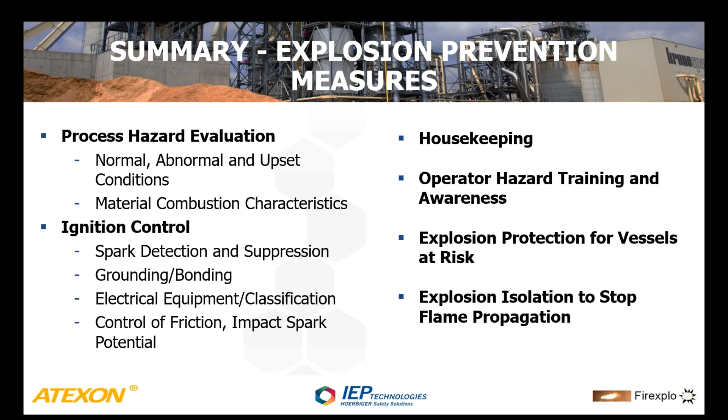That's the conclusion of my presentation. Anna, I'll turn it back over to you.